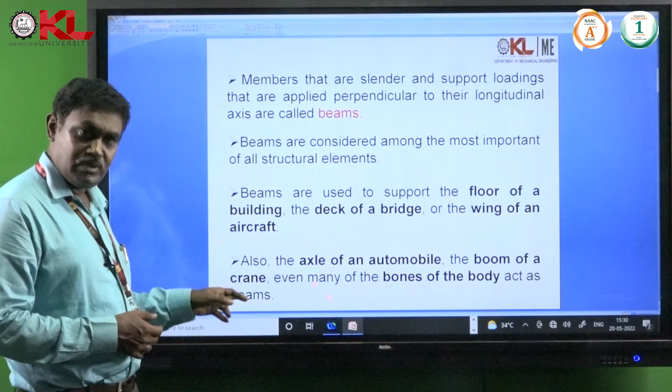So beams are considered among the most important structural elements, and beams are used to support most of the floors of buildings, the deck of a bridge, the wing of an aircraft, the axle of most automobiles, the boom of a crane, and even many bones act as beams.

Now let us see the different types of beams: simply supported beam, cantilever beam, overhanging beam, continuous beam, and fixed beam.

In a simply supported beam, the beam at the two extreme ends is simply supported, and the beam lies on that. In a cantilever beam, one end is fixed and the other end is free, so this type of beam is called a cantilever beam.

In an overhanging beam, there is one support and another support, and behind the support some portion of the beam extends out lying beyond it. Those beams are called overhanging beams.

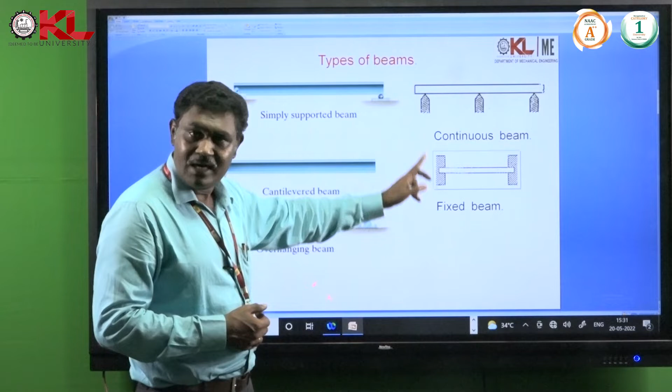Coming to the continuous beam, it has more than one support - first, second, third, and so on, a number of supports. Beams carried on more than two supports are called continuous beams. And beams with two ends fixed are called fixed beams.

Now coming to the types of loads, on beams there are varieties of loads acting. Let us see the few types of loads, what they are.

If a single concentrated or point load is acting at the supports, that is called a point load or concentrated load. Here it is a UDL load - UDL means uniformly distributed load. Here the load is uniformly distributed over the length of the beam, given as W Newton per meter length. These loads are called UDL loads.

And here is a uniformly varying load - you can see the load varying, at one end it is minimum and at the other end it is maximum. It's a uniformly varying load.

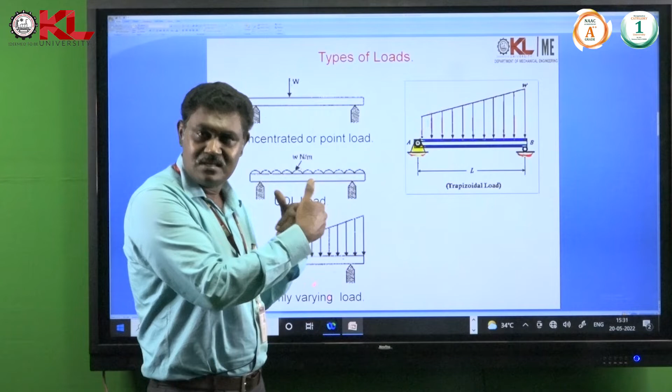Similarly, in this category there are trapezoidal loads also. At one end it's not minimum - some amount of load is there, and at the other end some amount of load is there. That variation in trapezoidal fashion is how the load is carried.

Now let us draw the shear force and bending moment diagrams. Because of these applied loadings, beams develop internal shear forces and bending moments that in general vary from point to point along the axis of the beam.

We should design beams knowing where the maximum shear force is acting and where the maximum bending moment is acting - then it's easy to design the structure of the beam. In order to properly design a beam, it becomes important to determine the maximum shear and bending moment in the beam, where it will be obtained. Once you know that, it's easy to design the beam structure.

The maximum value of the shear force and bending moment can be obtained directly from these graphs. Once you draw the shear force and bending moment diagrams, you can easily visualize where the maximum shear force is and where the maximum bending moment is.

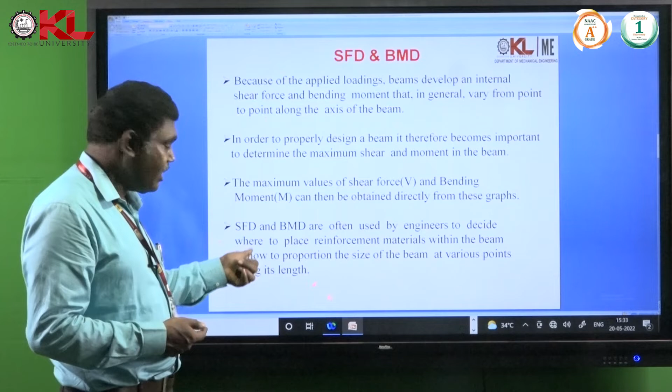So the shear force diagram and bending moment diagram are often used by engineers to decide where to place reinforcement materials within the beam, or how to proportion the size of the beam at various points along its length. Once you know the shear force and bending moments, you can easily decide where to use maximum load capacity and where to use other materials.

Most civil engineers, before placing items or any loads, should first know the shear force and bending moments.

Now, before going to draw the shear force and bending moments, we should know the sign convention. The sign convention is very important while drawing the shear force and bending moment diagrams.

The bending moment is referred to by the letter M and the shear force by V. The shear force is acting in the clockwise direction.

For bending moment, there's sagging and hogging. When the beam bends like this, that is called sagging moment - sagging moment and clockwise shear force are taken as positive values. When the beam bends like this, that is hogging moment, and shear forces in the anti-clockwise direction are taken as negative. That sign convention is very important.

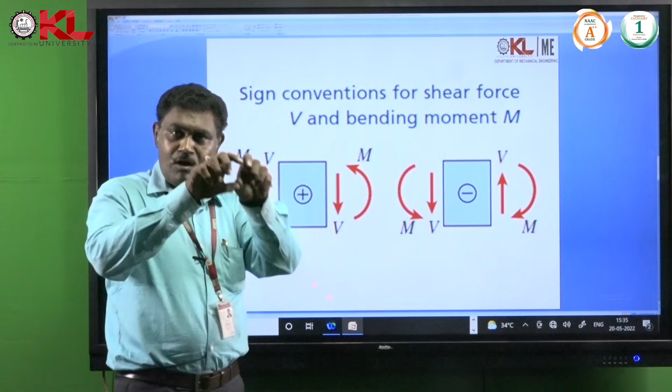Remember the sign convention before going to draw the shear force and bending moment diagrams. The sign convention for shear force is: clockwise is positive, and sagging moment is positive, whereas hogging moment and anti-clockwise forces are taken as negative.

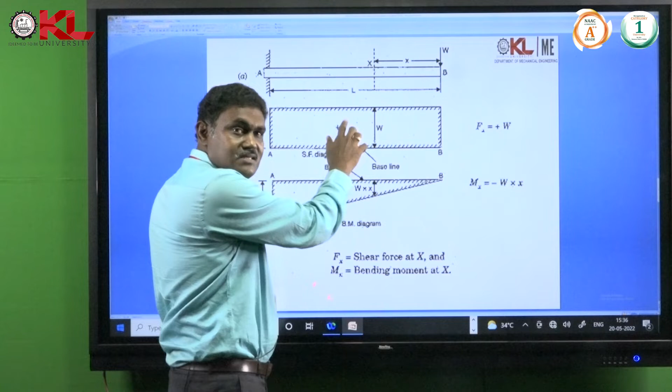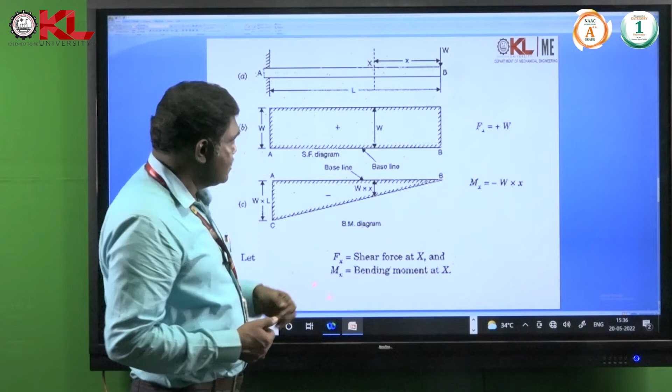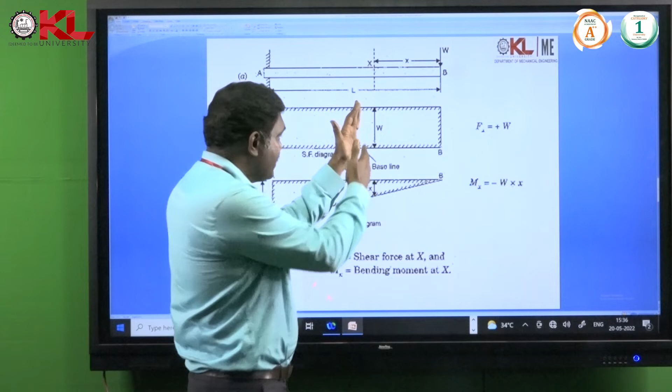Now coming to the bending moment, at point B this creates a hogging moment, which is taken as negative. We can calculate the magnitude of the bending moment as force multiplied by perpendicular distance. So at any point, the bending moment equals W into X, with a negative sign.

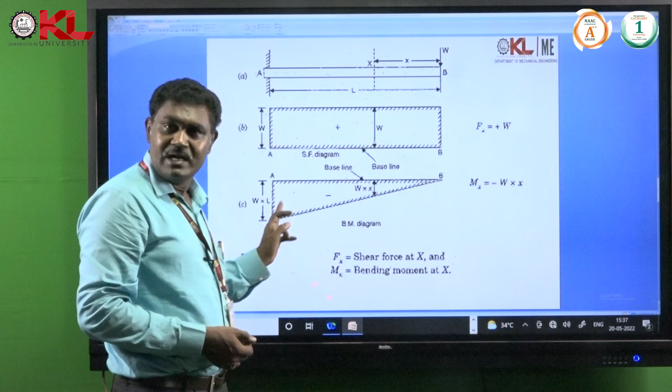The maximum bending moment is obtained at the fixed point. At the free end, the bending moment is 0 because the distance is 0, and at the fixed end the distance is maximum, so maximum bending moment is obtained there. This is the bending moment diagram for the cantilever beam.

Next, we will see multiple loads instead of a single load. Take the same cantilever beam with 3 different loads. Since these loads act in the clockwise direction, they all create positive shear force.

From point D to point C the magnitude is the same, 800, and at point C, 500 newtons is added, so 800 plus 500 equals 1300. From there the same load continues, and again 300 is added to the previous value. These three add together to give the maximum shear force at the fixed end.

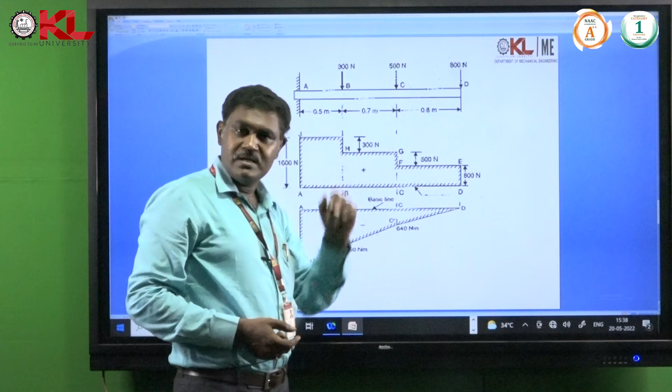Now coming to the bending moment: at point D the bending moment is 0 since the distance is 0. For any other point, we calculate force multiplied by perpendicular distance to obtain the bending moment. For example, 800 into its distance plus 500 into its distance, added together, gives the bending moment. All these values are negative because this is the hogging moment, and hogging moment takes the negative sign. This is one example.

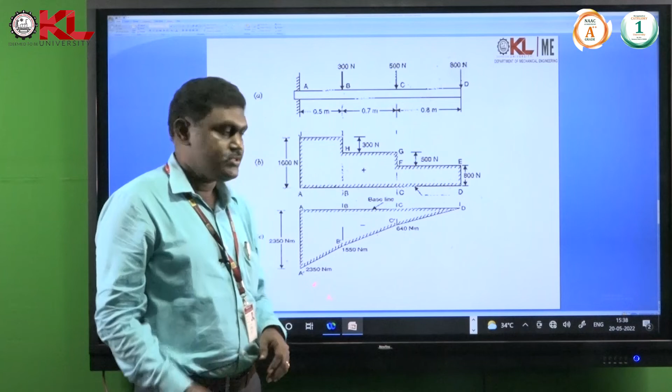Now let us see another example: a simply supported beam subjected to a point load at the center. Here, at the two supports the load acts in the vertical upward direction, and at the middle the load acts vertically downward. This load is shared equally by the two supports, so if the total load is P, each support carries P by 2.

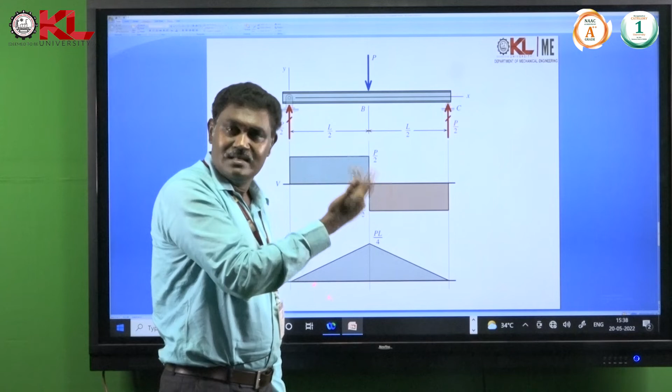So for a simply supported beam with a point load at the middle, this is the shear force diagram. Now coming to the bending moment diagram: since this is a simply supported beam, it creates a sagging moment, and sagging moment is positive, so this bending moment diagram is positive.

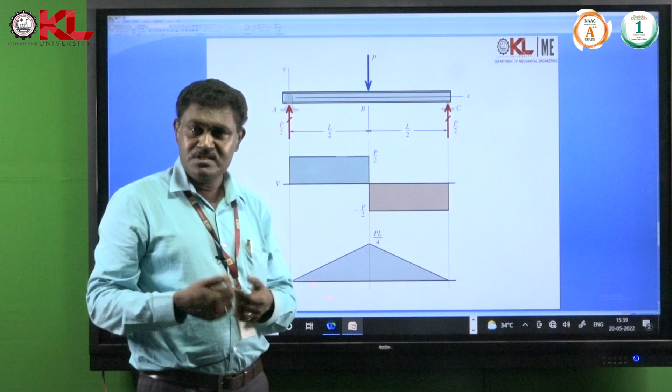The magnitude is calculated using the same formula, load multiplied by perpendicular distance, to obtain the moment.